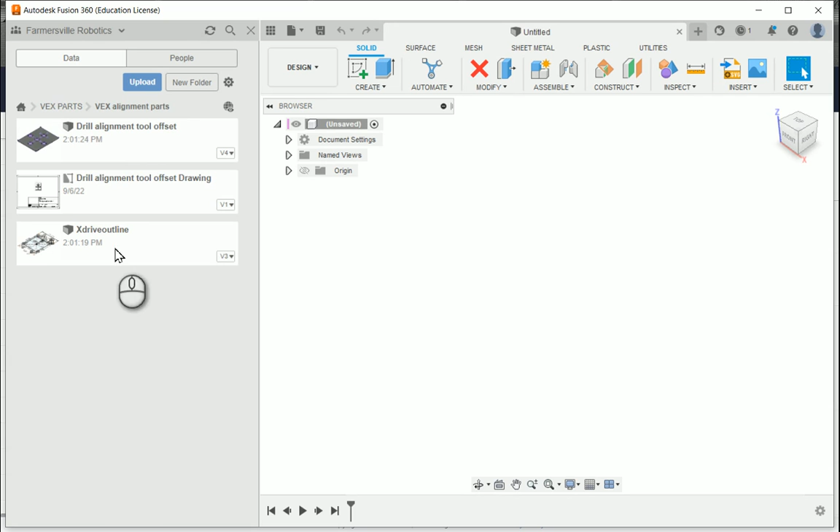So first I'm going to bring up the CAD file, and then we're going to look at the drawing, and then we'll go to the actual alignment tool and show techniques for how we manufacture things.

So first of all, you see it's the tool. You've got a component that's down here, and inside this component you have the 3x channel, and then you have locations and everything that are marked off inside here.

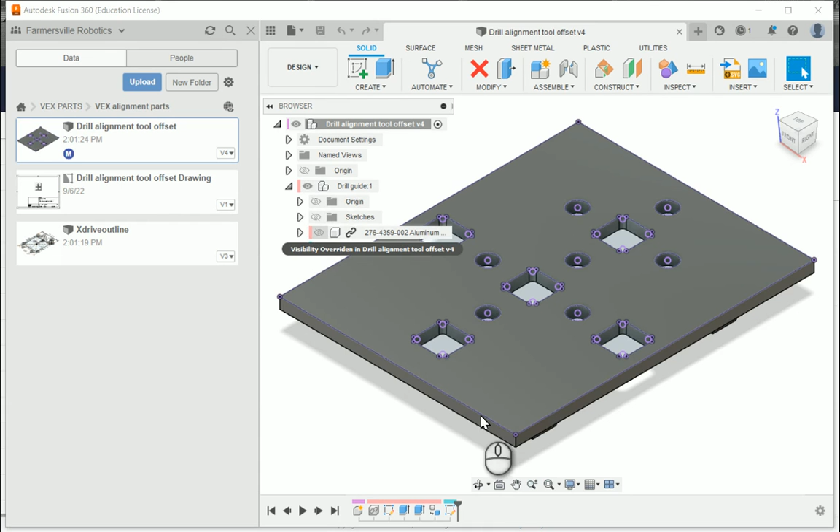So I'd say get good at your projections and everything, so when you're creating these custom parts you understand, you can just take the geometry, the faces, all the profiles and everything, and just project them and then start using them, create whatever tolerances you need.

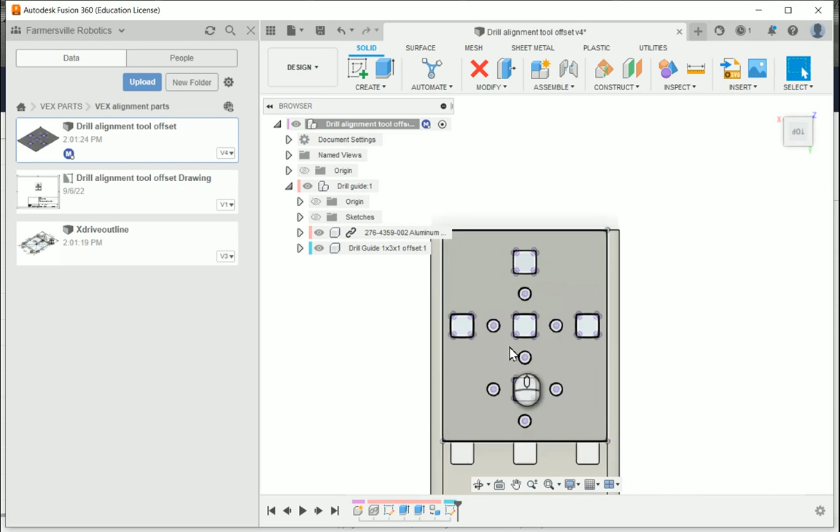So if we take a look inside of this alignment tool, which we can do so by clicking the look at, and then we'll bring it forward so we can see it a little better. Now let's get inside of it. So I'm going to turn this off.

So that is a 1x3x1 piece of structure that we brought in. See where it's linked? You could actually take that link away, make a custom piece. But for this purpose, I'm not breaking the link because I don't want to edit anything or edit in place.

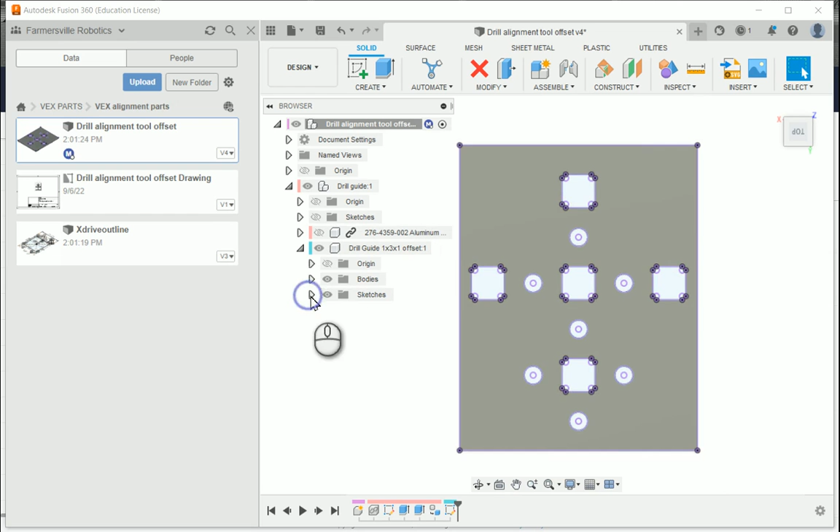So turning that off, now we're going to bring up the sketches so you can see what happened inside of this part. So as we turn those sketches on, you can see where the alignment holes were positioned, and then also down here at the history, you have where the sketches were made, you have the extrusions.

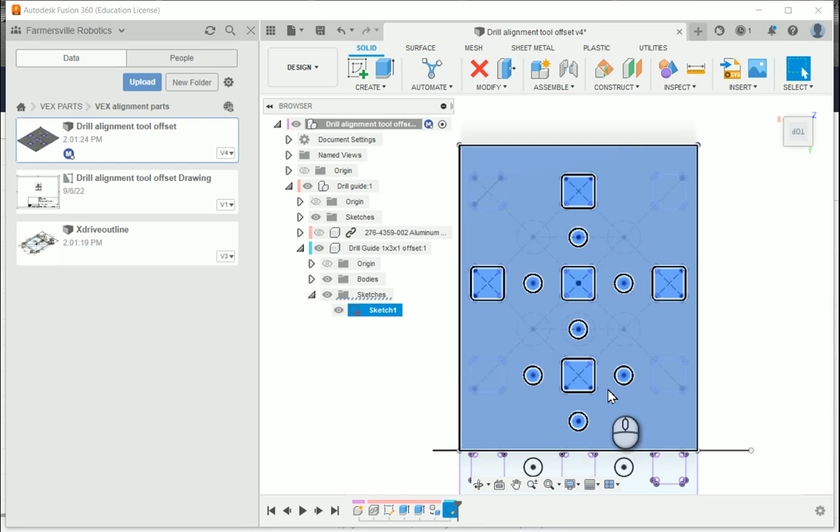So one thing that you don't see in this timeline right here is the patterning. So what you can do is find your center lines or whatever dimensions you're trying to get here, and then you can use patterning to put all the holes that you want. And you just got to understand how the VEX part is set up.

One of the best things that you can do is just take the inspect tool and go over pieces of these C channels, and you'll see what the distances are. And you can take the one that's not turned off, so we can inspect it from here.

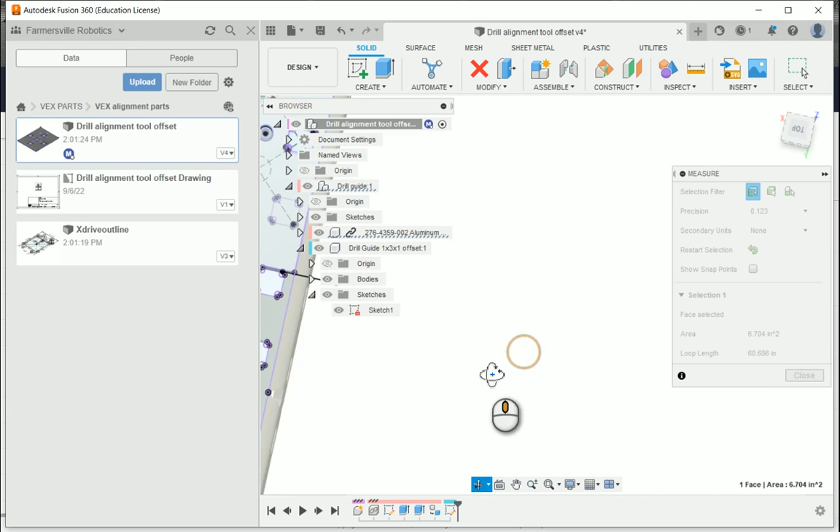This face to this face over here, and we can see distances from these selections, and then you know that from those points, that point to that point, sizes for dimensioning.

But what you can see is we use construction lines to go from these center points and all these fillets that are on here, and we made the crosshatch, but then figuring out these locations just using patterning so you can see that.

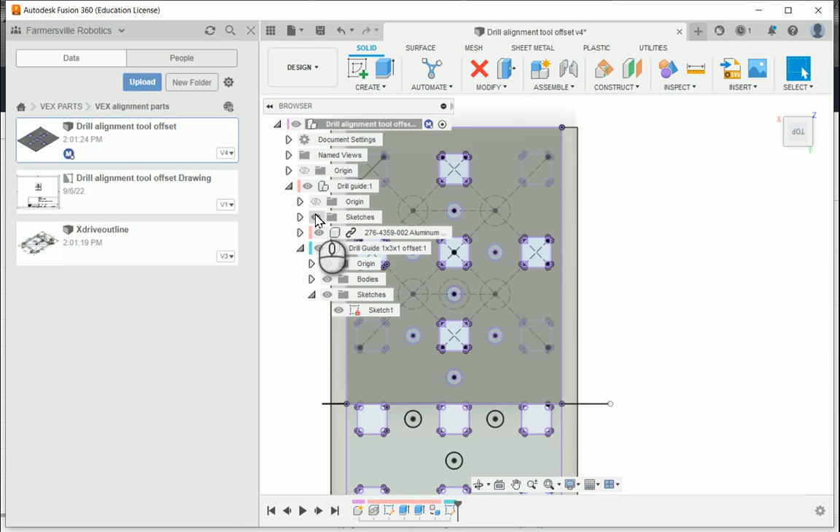So the main purpose is for you to be able to create drill guides or marking guides, so that when you want to create like a gear mesh that is non-typical or not the standard, you can actually take this 3x and create it, or other pieces of C channel.

So once you have this done, there's one or two things you can do. You can 3D print this part. It's a 1-to-1 scale. So what that means is if I printed this out and then I took that drawing...

I cut the actual part out, I could lay that onto my piece of C channel and make marks based on the paper guide. Now, the 3D printed tool, I think, is a cool way to do it, because you use these pockets right here to create extrusions that then align it a whole lot better.

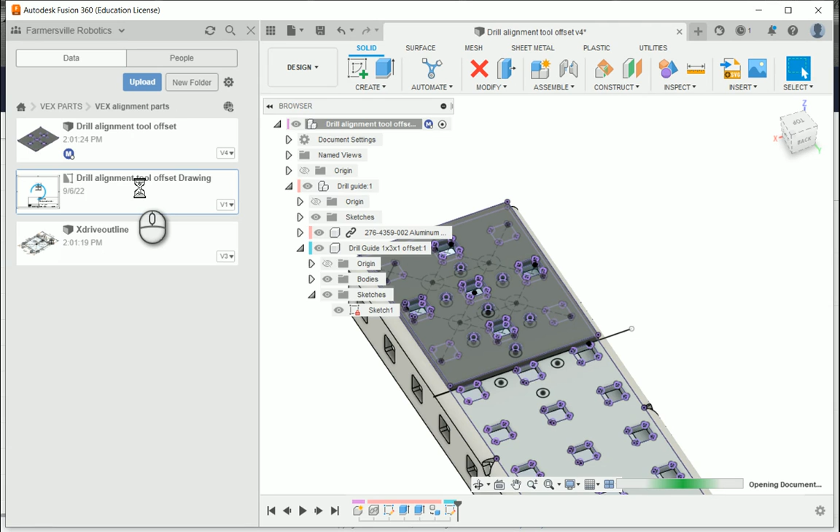And we use these, and also small little manual mills to locate holes like this. And this just gets you used to locations and how to create a jig if you were going to create multiple locations and you're not fast enough on the manual mill.

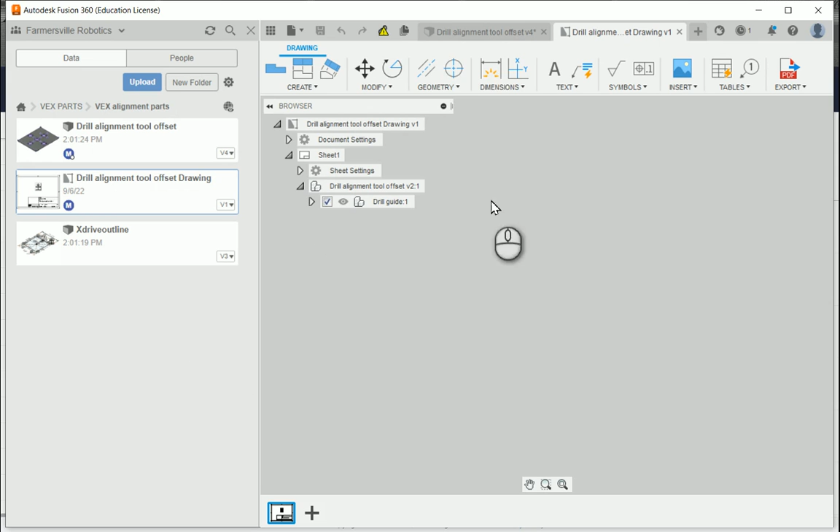So I'm going to go ahead and turn this back on. Then I'm going to print this out, and I'm going to show you through the video of how exactly we are using this alignment.